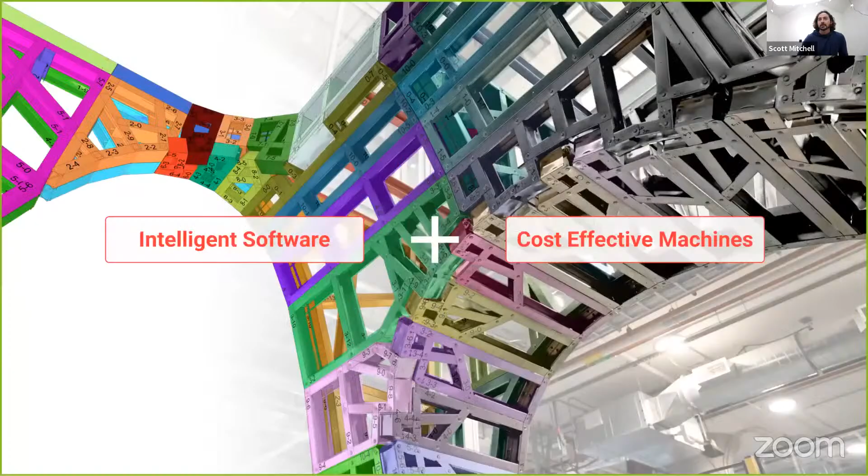Our mission is to enable architects to realize their boldest ideas. And what we've come to realize is that means enabling builders to construct those bold ideas efficiently. And the way we are able to do these things efficiently is by combining intelligent software with cost-effective machines. So we're using some unusual machines, and we'll get into what that means and some examples of that. But it's different than some of the machines that you're probably more familiar with.

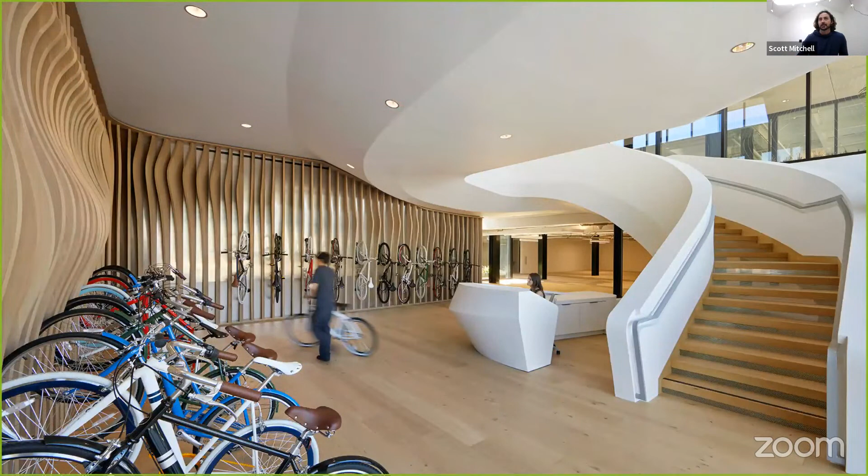So our software generates a fabrication-ready model like this through a computational process, and then automatically generates the machine files and the assembly information that you need to go build that exactly as the model has. We're going to get into a whole bunch of examples, but the idea here is you can see there's a wide variety of different geometries that we're able to take, run through our software and a computational process, and build extremely precisely.

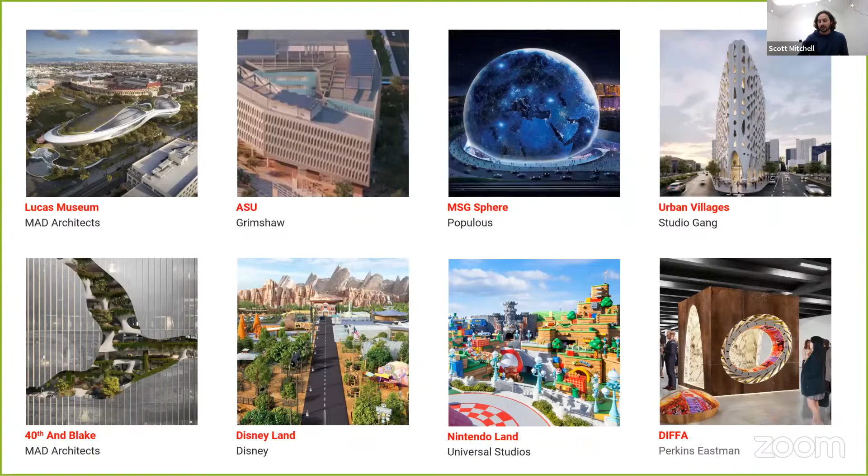And like Jose Luis said, we develop software. Stud Finder is kind of our main software. And also the reason we're called Stud.io is because a lot of what we've done is with steel stud framing. But we'll get into a couple other types of fabrication as well. And we've been able to take this software and work with builders and architects to build some pretty exciting projects, from the Lucas Museum, MSG Sphere, Nintendo Land, Disneyland, Universal Studios. A lot of really cool opportunities to demonstrate the value of some of the research that we've been doing.

But at a glance, what a project looks like for us and what we get brought in for is sort of probably what you guys are studying for computational design. You have a bunch of unique but similar conditions, and you want to develop a computational approach that's going to allow that to get designed and allow that to get fabricated and built. So this is an example project.

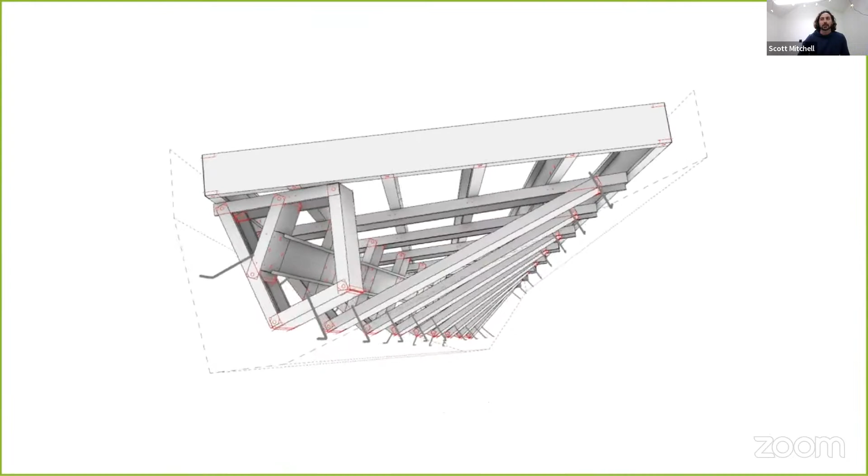This is an actual project that we worked on where there are all these GFRC, which is glass fiber reinforced concrete columns. They're all slightly different shapes. We want to develop a system that will generate automatically, go to the machines automatically, and be easy to put together. You can see the bulk of this is light gauge steel stud framing that's digitally fabricated. The software is adjusting to changes in the geometry from panel to panel, and basically changes the layout of the studs to accommodate the geometry of that panel.

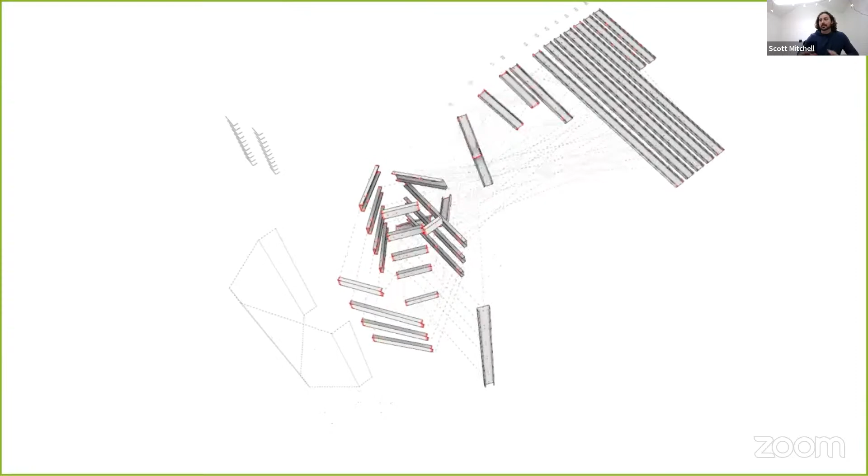There are also those little rods that just flew off, which are bent bars, another type of fabrication we'll get into. But the idea with all this is that the model is fabrication ready. So you give it the geometry, it gives you back all of the fabrication information you need. Every single screw hole, the length of every single member, all the connections that need to be made, and all that information is contained in the model, can be sent to a machine that's going to make the pieces and then communicated to a person that's going to be putting those pieces together. Almost like a Lego set or an erector set. So this is the kind of thing that we're doing every day on different projects that are getting built.

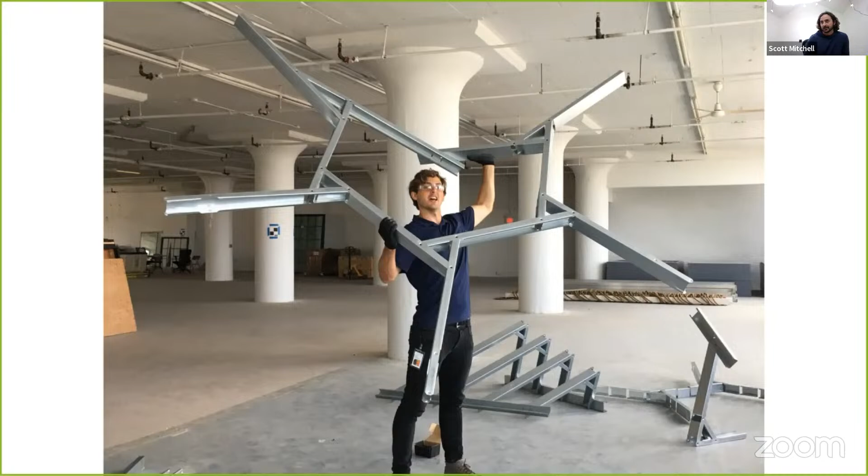But I want to back up for a second to the beginning of this story. This is me a little over 6 years ago. This is in Boston at Autodesk over in the Seaport. I was an intern at Autodesk. This was while I was in architecture school, pretty heavily focused on computational design. And they basically gave me this opportunity to come into Autodesk, where they have all these machines in their technology center. And essentially they said, just do something cool with this steel stud roll forming machine. And so I got to spend the summer just focused on that. And basically I haven't stopped since.

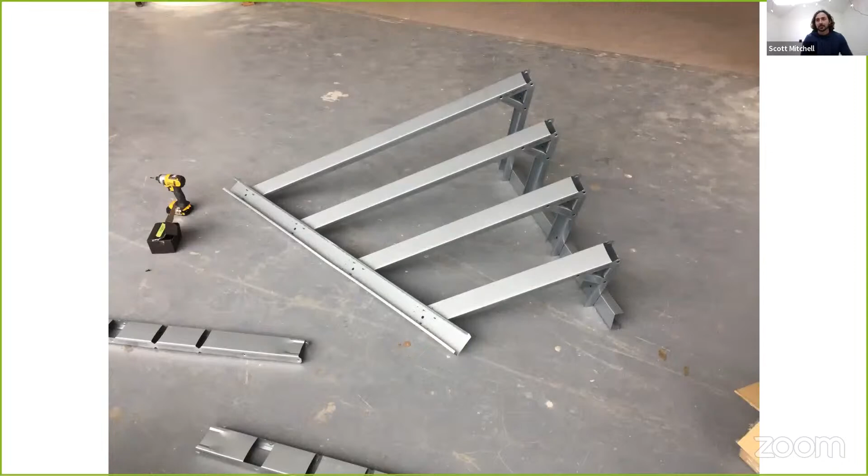But week one, we were doing real simple stuff. The idea in my head was, I want to find ways to use this machine that no one's ever thought of before. And probably no one had thought of this before, but it's not necessarily a good idea, but it was a start. So we were playing around in Dynamo and Grasshopper, and we're exporting stuff to this machine. Here we're working with laser cut wood pieces, which doesn't make a whole lot of sense in hindsight, but led to some other ideas. And by the end of the summer, I had actually come up with a pretty impressive structure using this machine. It's building a giant sphere with steel studs. It's just something that people hadn't done before, and that was really what was exciting about it for me.

And I could have stopped there, but I wanted to build some generalized system that would allow us to explore a whole bunch of other algorithms and things that were of interest to me. And so I started working on this idea that you could take any planar polygon, feed it into the software, and it would generate members and studs on top of it. And I was using Grasshopper. You guys are probably familiar with the exact same workflows that I was using. And I would take every polygon and solve it independently.

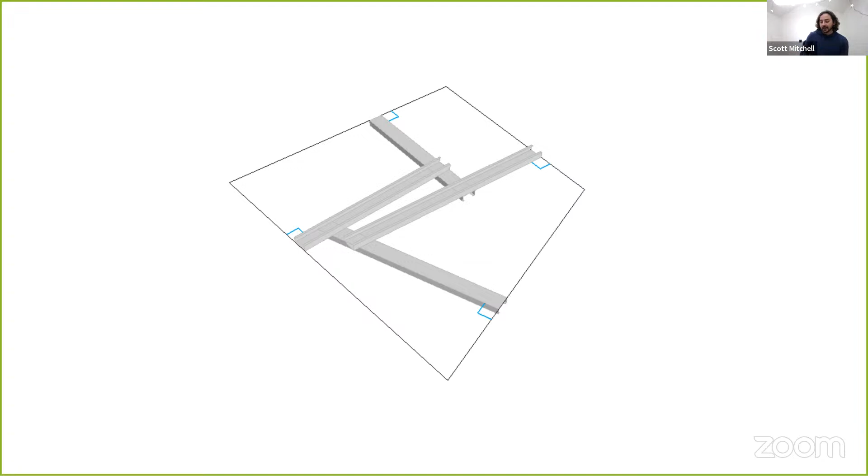I can't believe you found this. I can't believe you found this photo. Dude, there's a bunch of them that are pretty good. Oh boy.

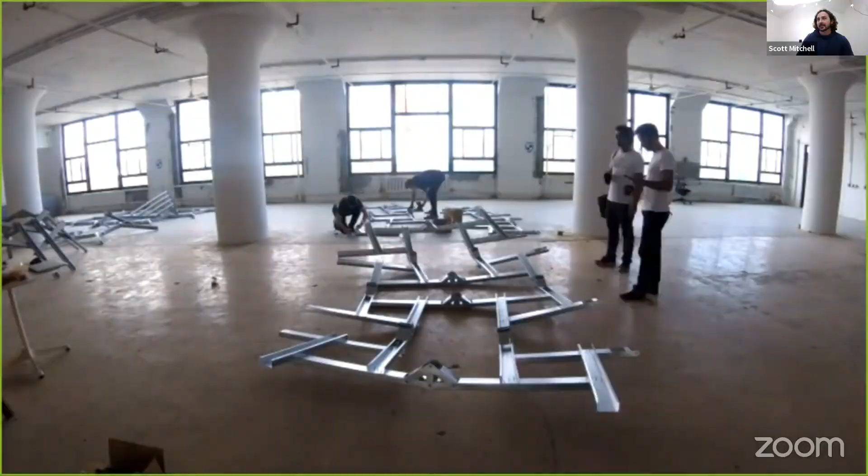We've come to do things in 3D, but that's still at the core of the solver that our software is built on. So basically I spent the end of that summer, into going back to my last year of architecture school, building out this software, testing it on some different structures, and it built this generalized tool that would take in lines, and it would tell you the valid ways where you could connect studs along those lines. So for any given line network you give it, there may be none, or there may be a handful of different ways you can orient studs along those lines and connect them in a valid way. So that is the solver that's still at the core of what Stud.io is doing today.

And there's a particular type of machine that is sort of a good candidate for this approach, for this type of computational design. So you're probably familiar, these are the types of machines that architecture students and architecture studios are using all the time. They're great for mass customization. We got robots, 3D printers, CNC routers, laser cutters. You can sort of make whatever you want with these machines.

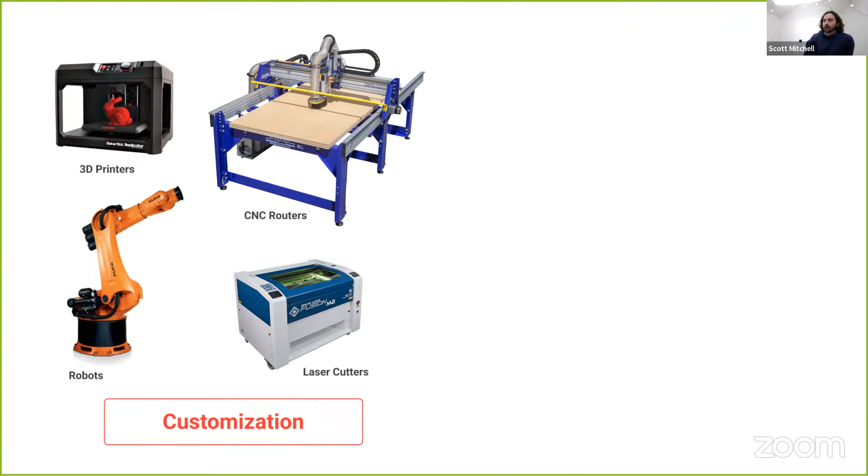So what we've realized we're doing is we're trying to bring the customization that computational design and architecture school kind of teaches you, bring that to these unique machines. And it turns out there's a whole bunch of potential when you do that. And it also turns out it's relatively unexplored. I still think there's a huge amount of latent potential for these machines to do extremely cool stuff.

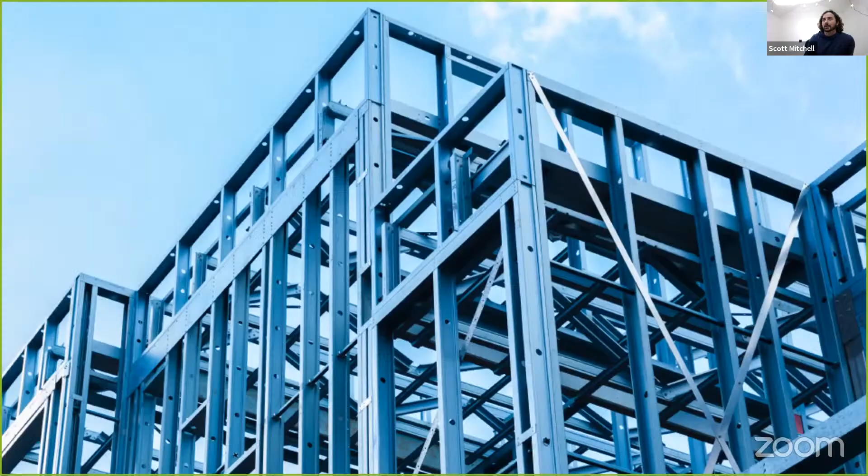But I want to focus in on the roll form machine for a second. So this guy is meant to just roll up studs. If you've ever driven by a construction site, you see something like this. The steel stud roll form machine makes basically exactly this kind of thing. You'll notice it's typically flat. It's typically walls and components meeting at 90-degree angles, not a lot of geometric variation. And that's because again, it's focused on doing one particular thing.

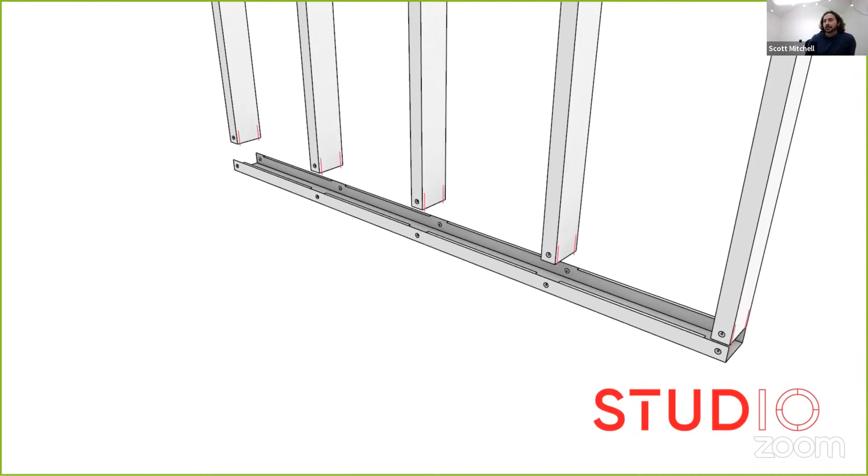This is a very basic one for light gauge roll form systems. So this is like a stud and a track, how you might build a wall. You could also pass one stud through another. Most people just do this at 90 degrees, and that gives you most of the typical buildings being built today. But we can change the angle of this. We just have to change where the punches are happening that allow one stud to pass through the other. And if you triangulate this connection with additional connections across the structure, you can fix two members at a particular angle.

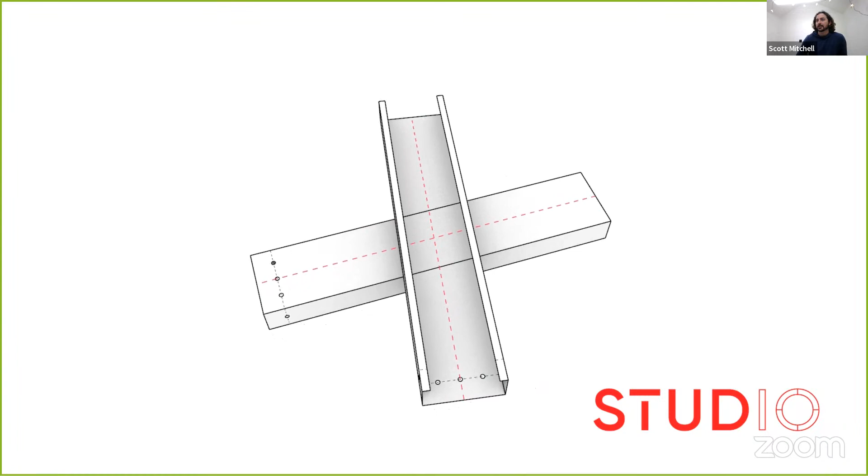And similarly, this is another connection type that we call handshake connection or back-to-back connection. We can take two studs back to back and do this 3 web hole punch, then align some holes on those punches so that if you put a screw through them, it will fix the 2 studs at a very particular angle relative to one another. Angle can be whatever you want. So it's still pretty simple, just 2 connection types.

And most of the stuff I'm showing you today uses just those connection types. But with just those 2 connection types and the parametric nature of them, you can start to do some really interesting stuff. Whereas most people are just building flat rectangular frames, we can start to break out of the plane and do 3-dimensional geometry. Like one of our first tests was just running every platonic solid through this.

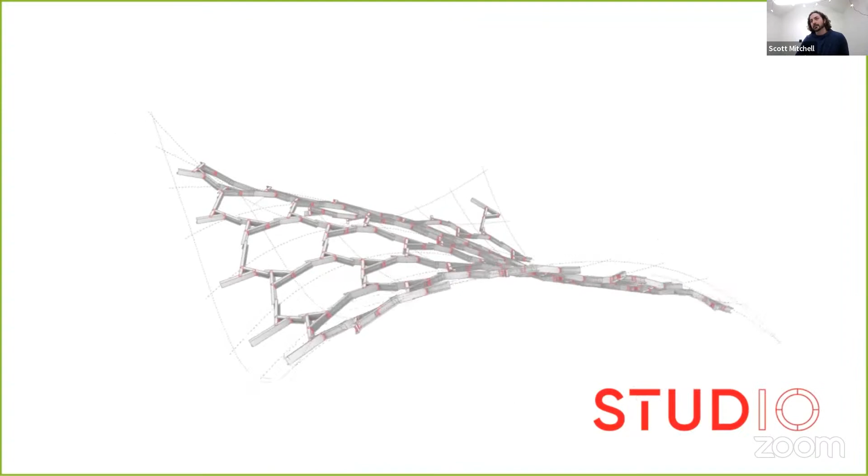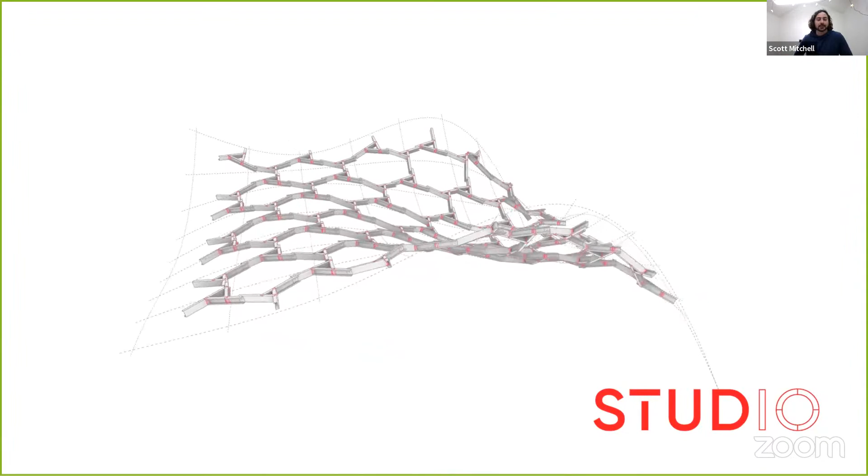But you don't have to stop there. We can really feed any surface into what we call the triangle system. And it doesn't matter how complex that is, it can be doubly curved. You can just generate this pattern across it where every single member is unique, but it has all the holes that it needs to connect to its neighbors at the particular orientation that's going to allow the builder to recreate the exact geometry that's in the computer.

So that's one example of a system. That was one of our earliest systems. But basically, you can write your own scripts, Grasshopper or Dynamo or whatever language you're trying to use to utilize these tools. You basically just have to draw lines and produce an analytical model that the solver will generate fabricatable members on top of. So you can come up with all different kinds of systems just using this idea of building on highly constrained fundamental components, these operations, into slightly more complex combinations or connections, and ultimately into entire systems.

And as someone who has kind of a history with other types of making, this idea I've noticed connects to other ways of creation that I've been involved with in my life, like playing games. I think the same way you have these components on the left, your pieces in chess, they are constrained in how they can be used, especially on an individual basis. There are very particular rules about how they can move. But what's interesting is when you start to combine those moves into strategies.

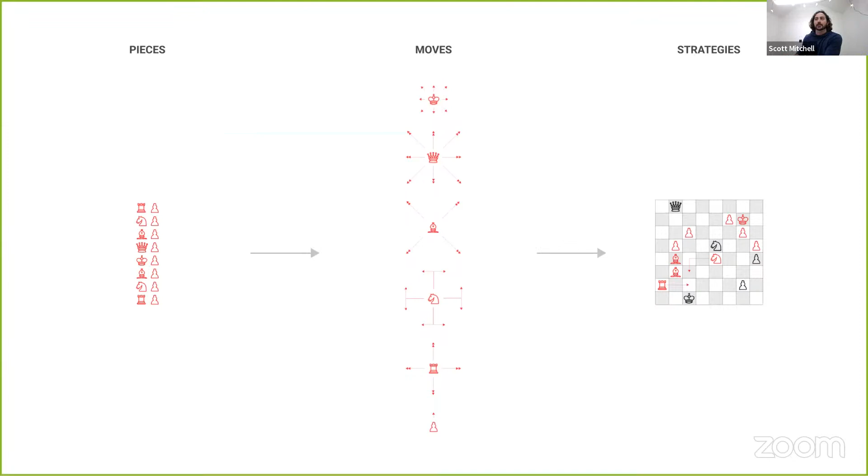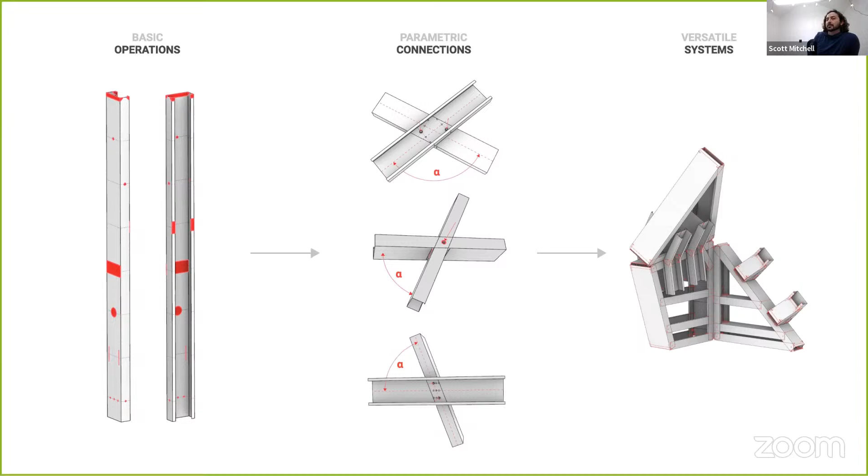So this, I think, is something unique to these types of machines that are industry focused versus the 3D printer, which has no constraints. You have to think creatively about the atomic building blocks of the machine. And I think what's really interesting about that is you have to be creative. It's like problem solving. There's this huge area of potential use of the machine that's just unexplored because people don't think to combine some of these operations in ways that they can be designed or combined.

And one of my favorite examples of that is the ability to curve studs coming out of the machine. So the machine wants to make straight studs. It's marketed on its ability to make straight studs. But it turns out with a certain combination of punches, you can actually start to curve studs in a precise manner coming out of the machine.

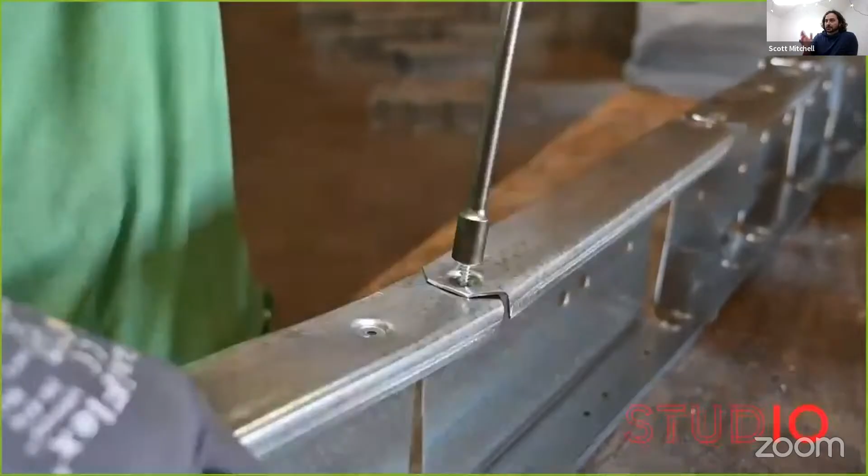And basically what you do is you punch what's called an end truss, which is that slit across the web, the wide part of the stud, and 2 little punches on either side of it. And if you snip between the 2 punches, fold them over one another, put a screw through it, it's going to fix the segments of this thing at a particular angle.

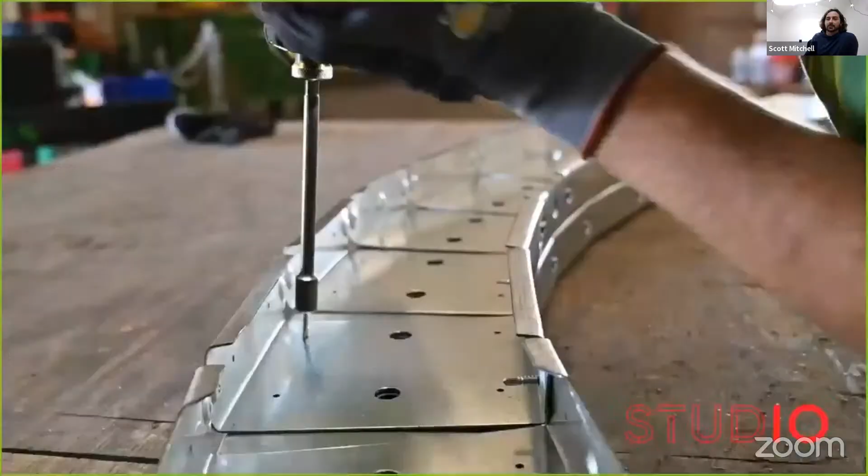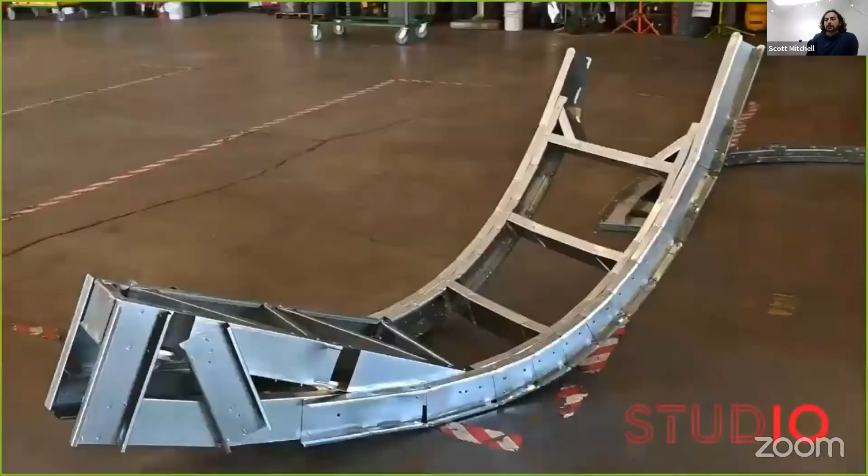One of the downsides of that is that you're cutting out some of the strength of the stud, but if you combine that with another stud that's back to back with it, that has alternating cutouts, you regain that strength, and you can start to take any sort of curve or polycurve and generate studs along that as well. And as you aggregate those curved studs, you can start to generate entire curved and doubly curved geometries this way.

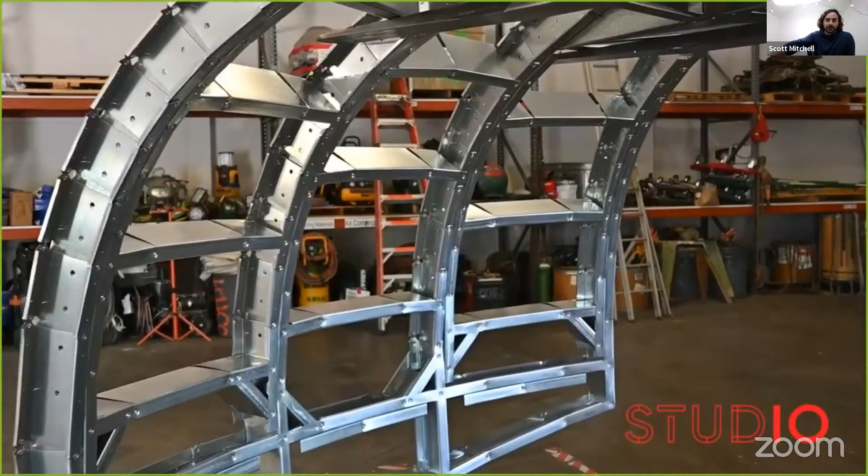And the reason that's so cool is the manufacturer of the machine didn't even have that in mind when they designed the machine. It's just something that happens to be possible given the right creative approach to using the built-in capabilities of the machine. So we're misusing the machine, but producing an extremely valuable use for the machine.

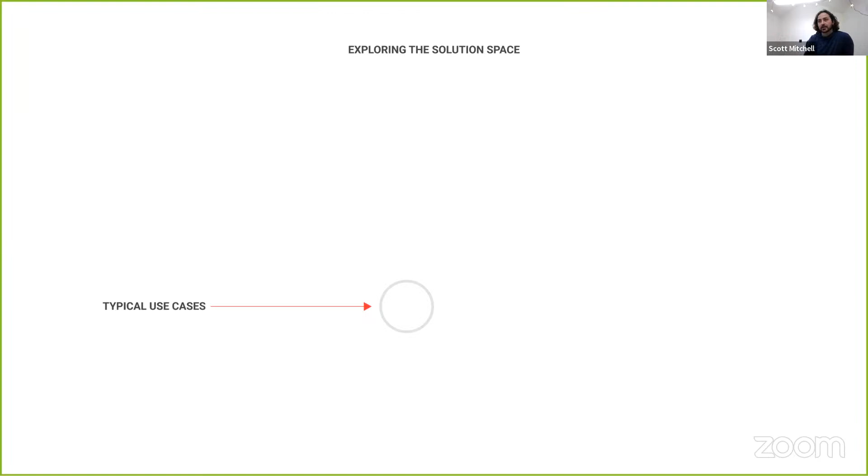And I think that's why we've had some success at Stud.io. There's a perceived solution space for these industrial machines, which is the typical use cases. So the contractor goes and buys a machine with that in mind. But we think that that's just a small portion of the vast potential of use and ways to leverage what the machines are capable of.

And so I think if you go back to those images of me messing around at Autodesk with Jose Luis 6 years ago, that was taking our first steps into what's possible if you start to be really imaginative in how you use the machine.

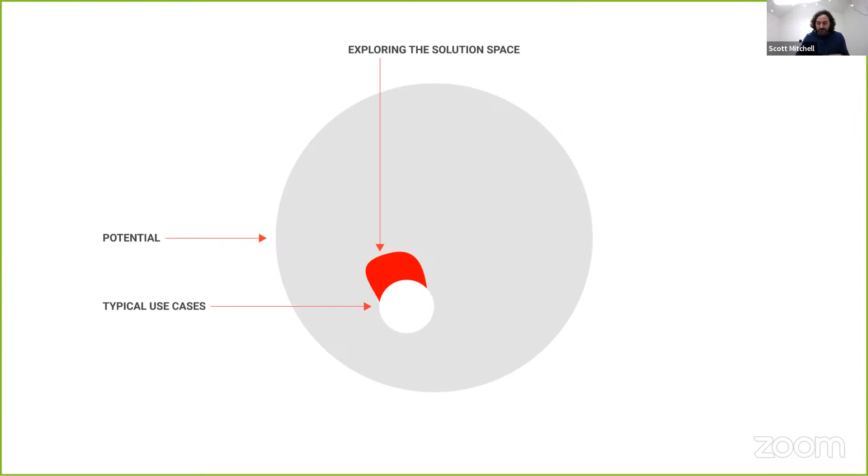And the way it's turned out is like every time you do one little experiment or play around with something, you generate ideas for another experiment that then maybe you go use what you learned there on an actual project, and that project spurs a couple ideas that can be developed further as experiments later on. And I still feel like there's so much, even with just the steel stud roll forming machine, there's so much potential that is still to be explored.

And to me, it's what gets me excited about doing the kind of work that we do. Because it's playful. Like we're playing a game. We are playing the machine like an instrument.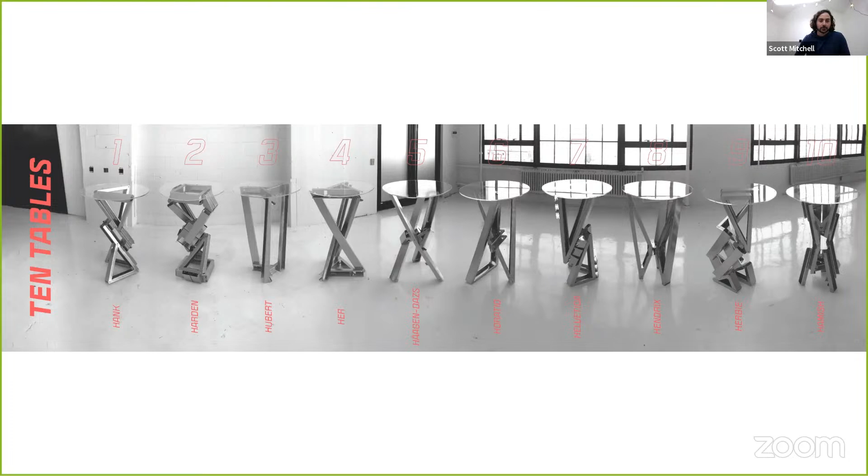So in between projects, which we'll get to in a second, we do fun stuff like try to make furniture out of the machine. We at one point just built a giant bird with the machine, just trying to prove what sort of detail we could get with basically 2x4 steel studs. We also have a design for a foosball table with the machine. It's like anything you can imagine you can build with this thing that's meant to just build boxes.

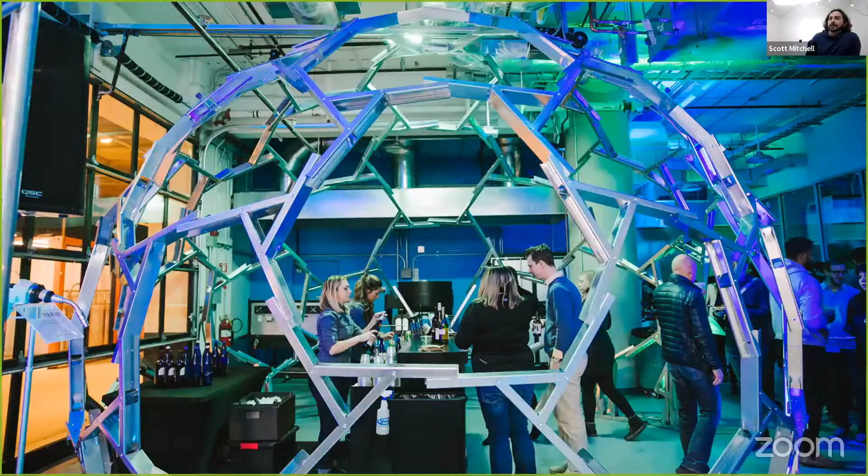So I've just got a whole series of images now that show some of what we've done since that time. So we started playing around with just kind of nonsense details with this machine, but that has led to all kinds of different projects and different geometries and different algorithms that we can deploy on projects.

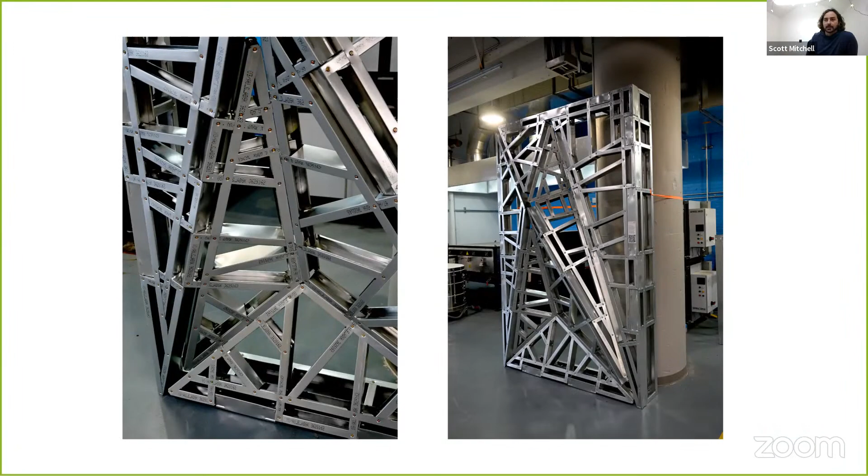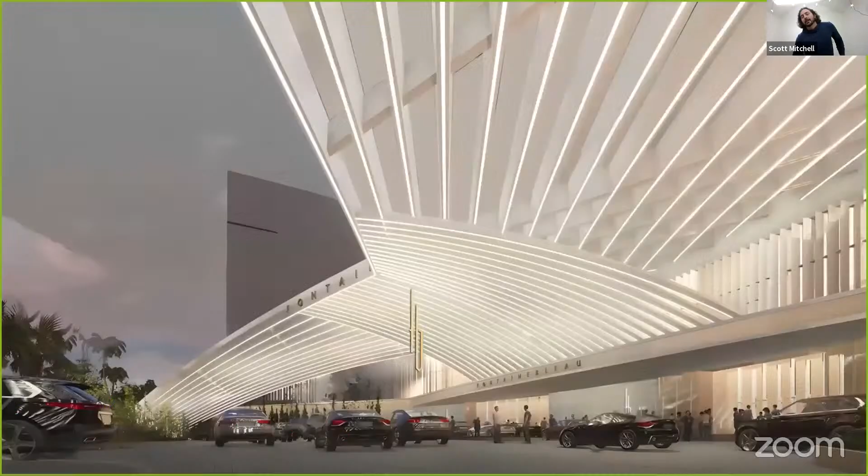It has also led to the development of our software, which allows people to design the more typical use cases for these machines, but also start to get more creative in what they're designing and what they're trying to build. There's really kind of unleashed creative potential. So anyways, it's been a very exciting journey. And so that's a bit of the history and the theory behind what we've been doing.

So I want to talk a bit about a couple of case studies where we've actually used those tools and the knowledge that we've developed on actual projects. So I'm going to start with the Fontainebleau Casino. So this is on the Las Vegas Strip. It opens up in about a month, but I think our scope is pretty much done at this point. We were brought on to help with the porte cochere. So this is this huge entrance to the casino that you drive under,

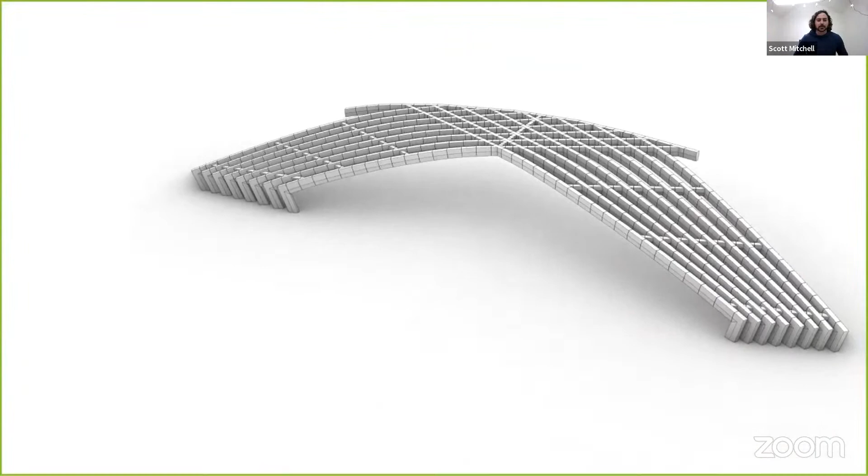and it's big. But the whole thing we're running through our stud finder software, along with a whole bunch of other Grasshopper scripts to rationalize the geometry. But before we get into the workflow, a little bit about the project. Like I said, it's really big. 500 feet across, 100,000 square feet of finish. There are 436 unique modules that made up the legs that are going out to the ground.

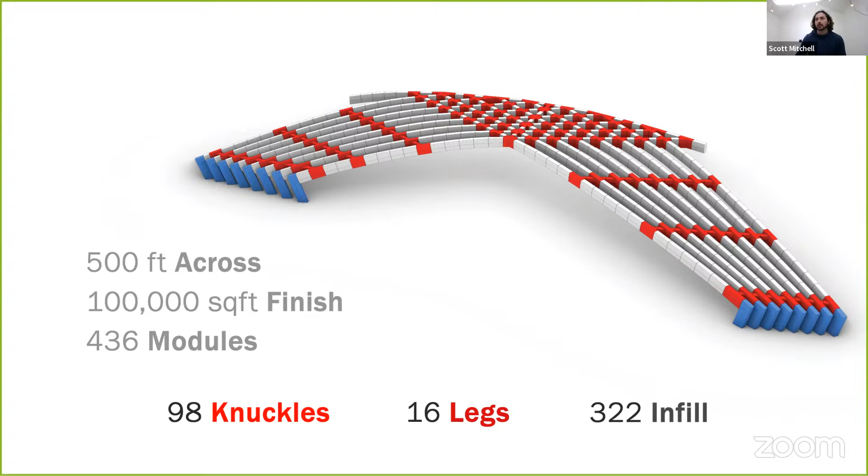Those modules break up into some types, we should say. There are 98 knuckles, and that's where the different beams or legs intersect each other. So the most complex one, we have what we call the legs, which is the actual part that hits the ground, and then the rest are the simple panels, the infill modules. Although even those are all unique shapes. All 436 are a unique shape. So we want to come up with a system that can execute all of those modules.

And so as a builder, you might say, I just want that to be a box. But as an owner of the casino or as the architect, you want it to have a little bit more geometry, make it a little bit more dynamic. The old way of building that, if you just took each side, built a flat frame, tried to put them together, you're not gonna be able to do that quickly and precisely.

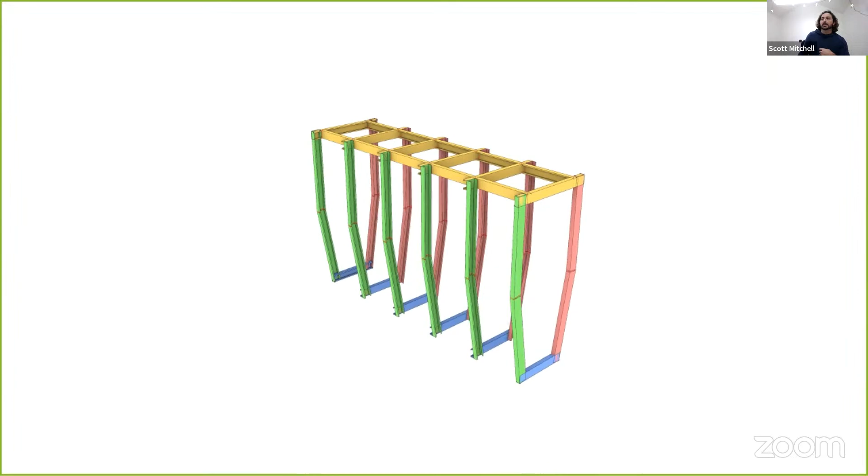So we use that curved stud detail. There's the handshake detail. So with both of those, we can have a ring of very accurately and efficiently fabricated and assembled studs around the geometry. And then we can connect those with the dimple or the typical connection. And that gives us a system that doesn't just reproduce the two-dimensional faces of the object, but the entire 3D object accurately, no matter what the geometry is.

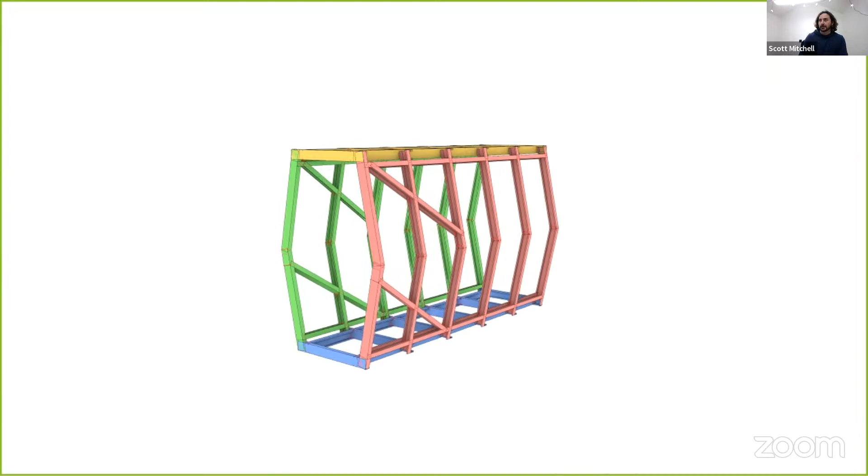And we don't just stop at generating the model. Obviously, we go to the machines, we produce the machine files to make the parts, and we produce the drawings that people need to put these parts together. And I mean, we're basically doing everything we can to make it feel like putting a Lego set together.

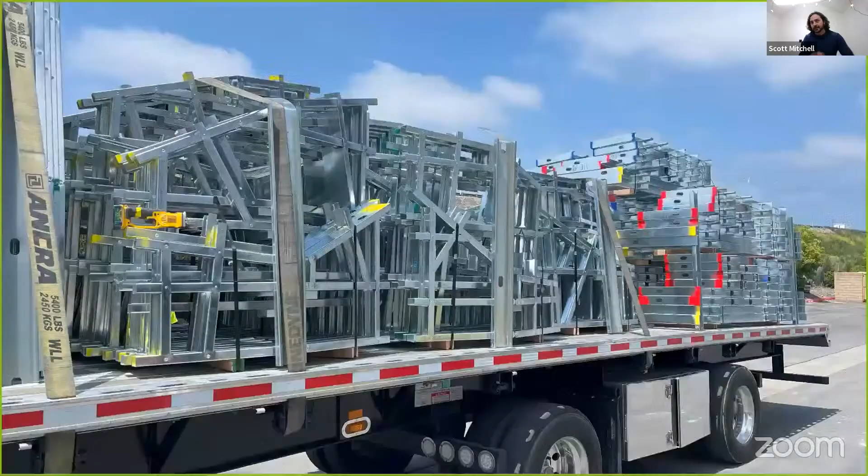Even the color coding on the drawings versus what's actually showing up on site. So they can basically just take the yellow panel and attach it to the red panel. The holes to put the screws in are already there, so they don't have to measure anything or use a protractor. That allows this stuff to go together extremely efficiently. Here's some of those panels installed.

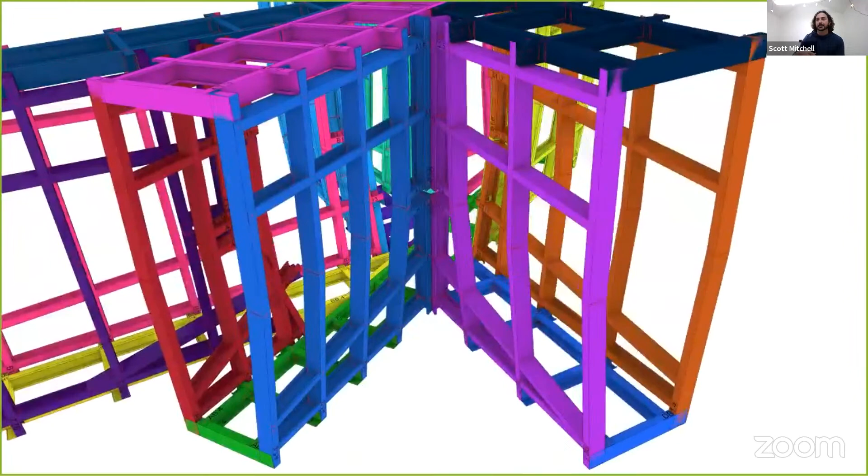But those are the simple panels. The infill panels take a little bit more complexity to accomplish, but basically the same idea. You just have to deal with where the different extrusions here intersect each other. So we develop a script that's going to handle that and feed the right information into Stud Finder, so that given a module, it will break down into several pieces, which break down into panels.

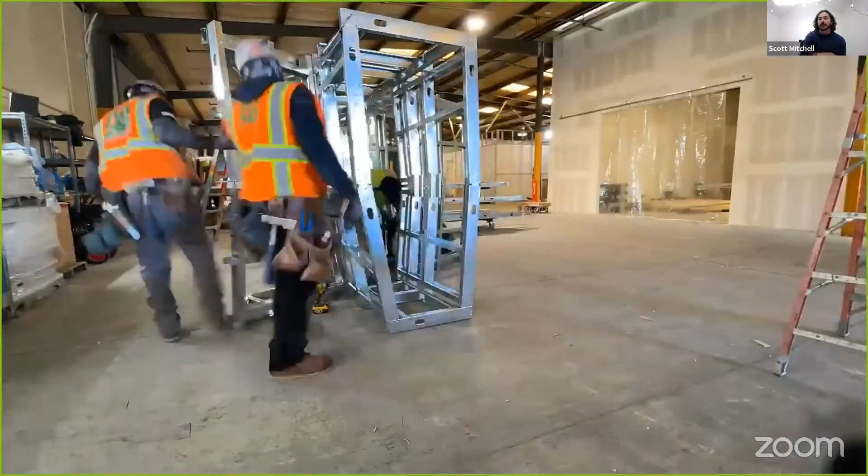And as that geometry changes, either across the project or as the architect changes the model, all of the assemblies and sub-assemblies and parts update to match the change. And then that goes together pretty dang efficiently, especially for a complex job like this. It's hard to measure that efficiency and speed sometimes, because it's not like they're building an identical building next door that we can compare against as a control.

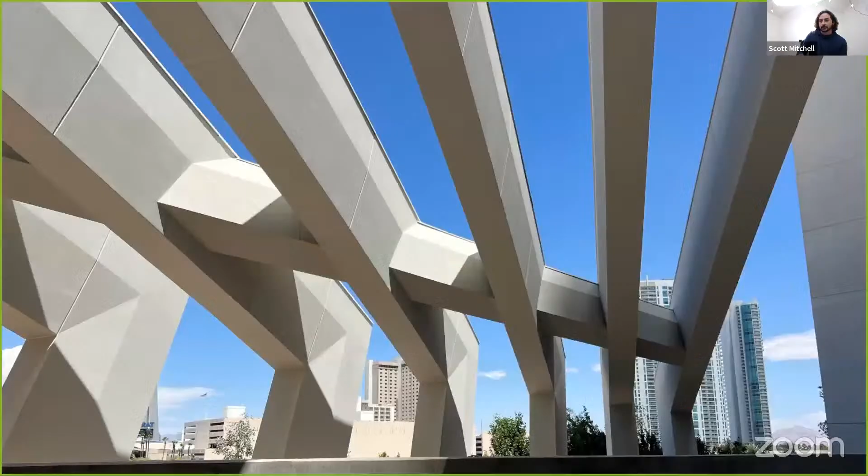But we can compare against the client expectations. And for this project, the assembly took a third of what was budgeted. So obviously a lot of value being added for the contractors there. And also that's the kind of cost savings that enables features like this to get built instead of getting value engineered out of projects. There it is, completed. And that one's opening up next month, I think, in December.

So moving about half a mile down the strip, another one of our projects was the MSG Sphere. We did not do the sphere itself, but we did the collar that's underneath the sphere. It had its own geometric challenges that we worked to figure out. When we enter a project like this, we think about what the constraints on the geometry are. Obviously, this thing is going to be curved in plan. It's going around the base of the sphere.

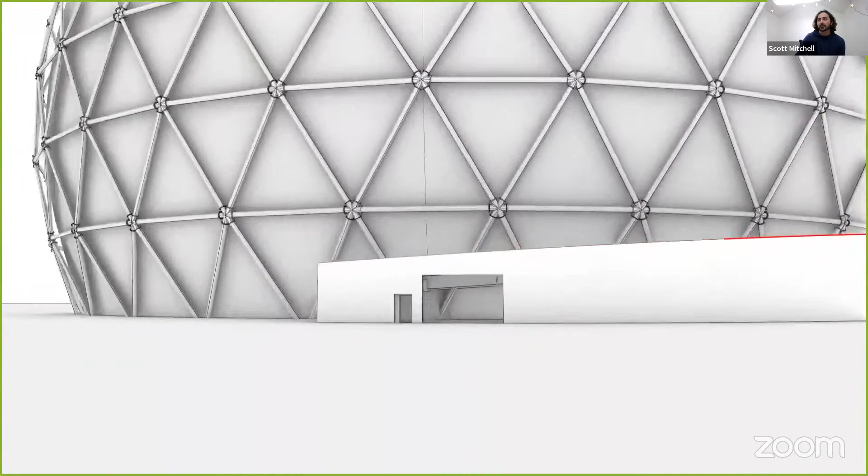It's sloping in elevation. And the most complex part of this was that it's slanted out, and that slope is changing. So how do we deal with that variable slope as it's moving around the building?

And the reason you really have to think through this is, I don't know if you've seen the sphere since it opened, but it's got all these LEDs on the outside. It's a super expensive building, and they needed to cut costs on the collar. So they wanted to build it out of a flat system, not some expensive curved system. So the challenge becomes, how can we take a flat system, with a flat frame and the foam on top of it, and create this geometry?

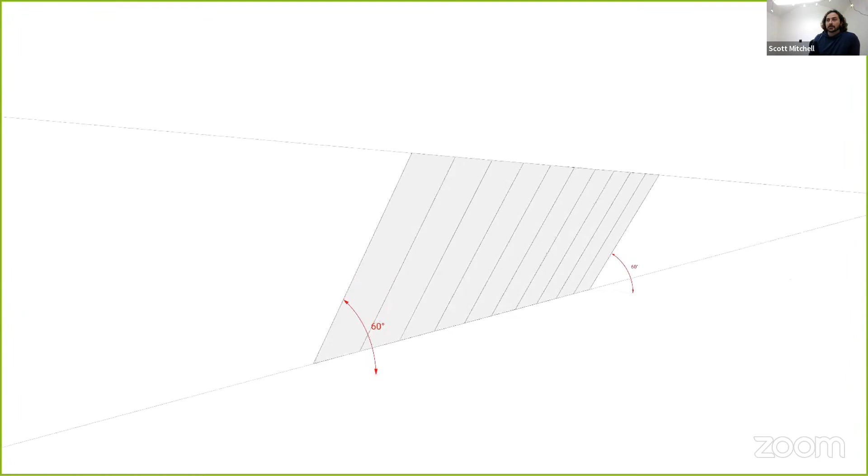So we spend a lot of time as computational designers thinking about geometry, and we start with the basics. If this is a flat wall, it's obviously very easy to panelize and break up into flat panels. If it's sloped out, it's still easy. If it's curved in plan, you see problem number one, which is that it fans out in elevation. But that one's easy to fix, because instead of using rectangles, if you make these into trapezoids, you're good. So problem number one solved.

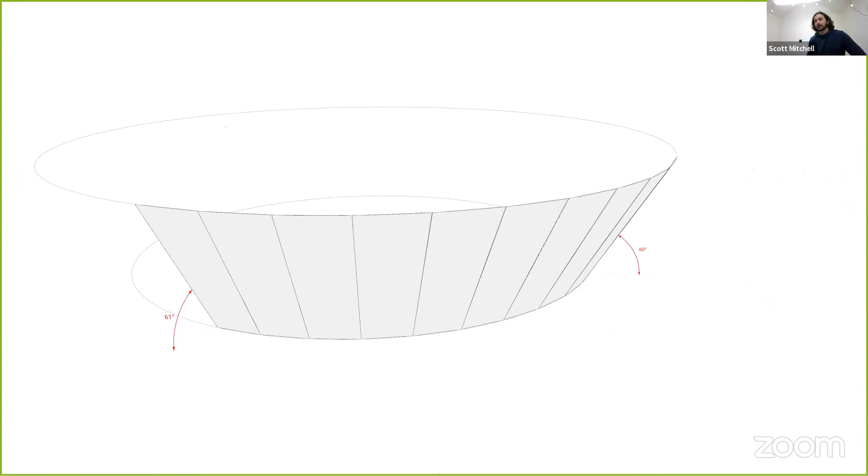Problem number two, though, is, remember we mentioned that the slant is variable. So if we start with less slant on the left and go to more slant on the right, we start to fan out in section as well, which was not design intent. The owner doesn't like that. So we have to come up with a solution. Intuitively, you think, I want to just take one corner of each panel and push it to meet its neighbor, so this thing is smooth.

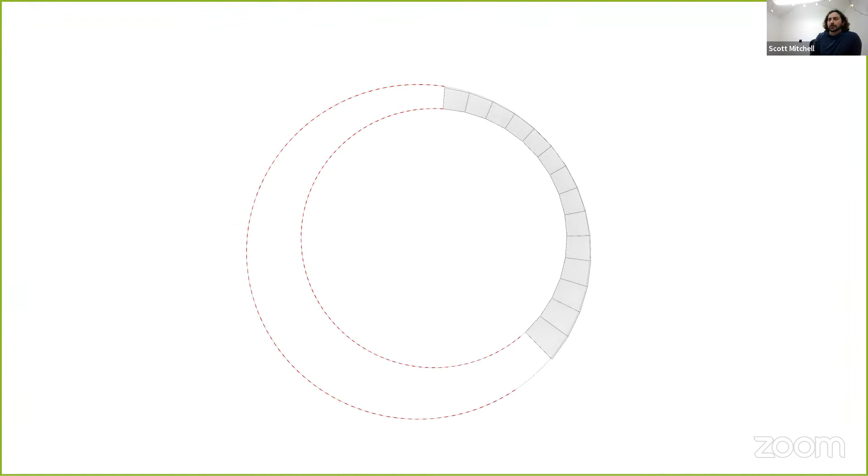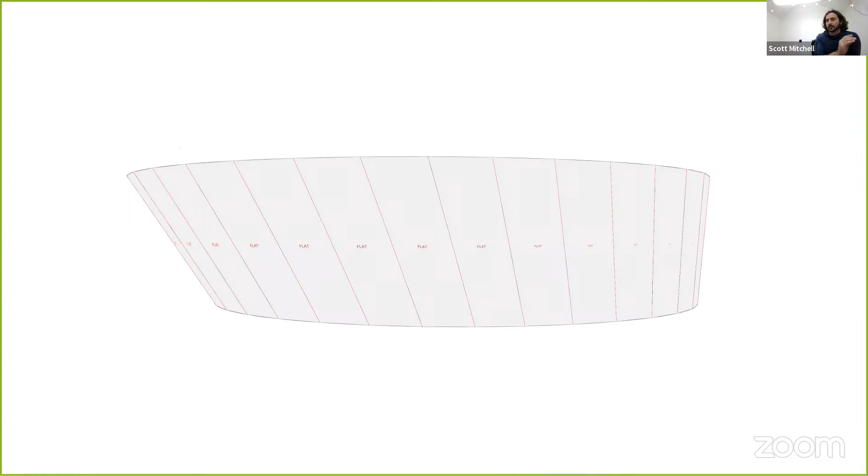But of course, at that point, your panels aren't flat anymore. But at least that gives you an understanding of the twist that is almost necessary for each panel to make it smooth. But we kept going into the geometry, and we realized that the top and bottom radius of this thing define two arcs, or two circles, which define an oblique cone. And what's nice about a cone is it's basically a pyramid with a whole bunch of sides that are flat. So instead of using the architect's joints, if we use joints that run through the apex of the oblique cone, we can get flat panels.

So this was kind of the geometry exploration side of this project, and we came up with two ways to break this thing up. Either you follow the cone and you can get flat panels, but your joints aren't necessarily what the architect designed, or you use the architectural joints and panels, and you're going to have twisted frames.

So we looked at, okay, what would it be like to deploy each of these systems? So on the left, you've got the slanted joints, but flat frames. And on the right, you've got vertical joints, but we have to make up that twist in the finish.

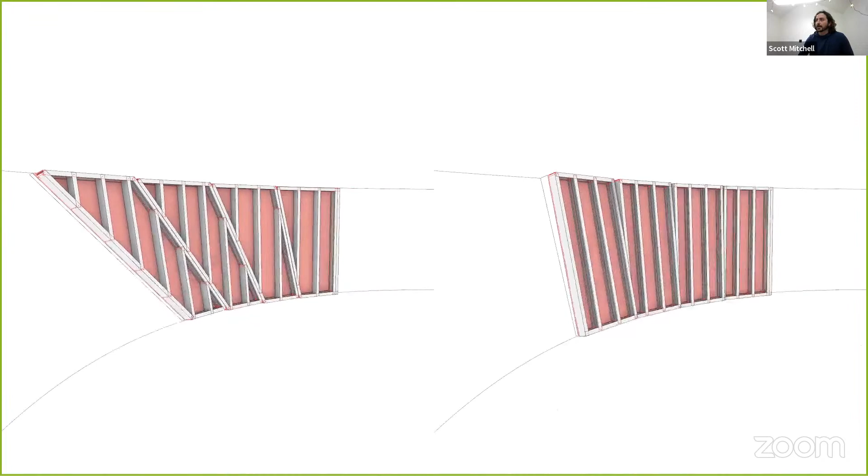And the way that we proposed to do that was, we'll keep everything flat, just change how the frames in the back are oriented. And then the foam that's on the front of this thing, we'll just put all the twist into that foam. So you can cut that with a hot wire, which is the same way they would cut it if it was flat as well. You just have to change how they're moving the hot wire as they cut the foam to get the right shape. And so we gave them both options.

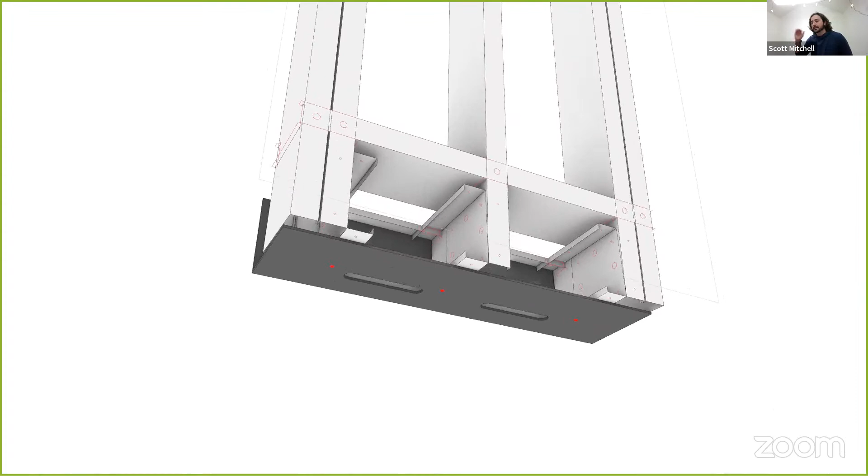They decided to go with the architectural joints, so the vertical joints. That's fine. So we went with the CNC hot wire foam. But this is what the framing system looked like underneath that. So you got just a flat frame that handshakes to a horizontal frame that gives you the correct tilt out. That registered to some other components, and then finally you put your foam on the outside, which gives you the exact geometry you need to line up to the panel right next to it.

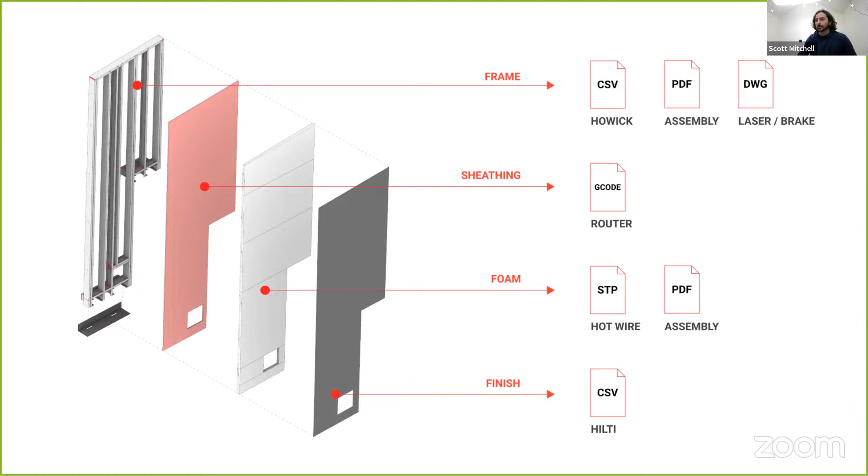And one thing that's becoming more and more important to us is not just talking to steel stud roll forming machines, but talking to all the machines that are going to work together to build what we've been calling a system of systems. And there are constraints within each system, and there are constraints between systems. But ultimately, you just need to solve those constraints and send the information out to the machines that are building them. And this works. So we send information out to the roll forming machine, send information out to the drawings that are getting printed, and the humans read and put the parts together.

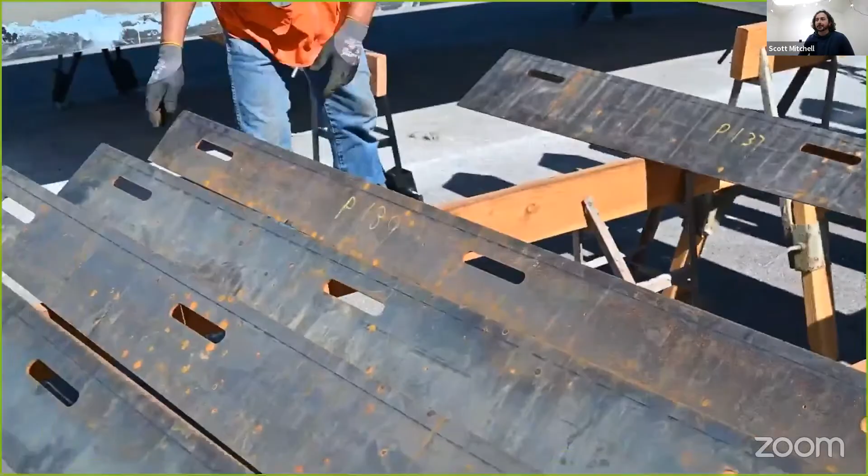Let me try and speed up through this. We've got the handshake connection there with the alignment holes that fix that bottom frame at the correct angle. We had these brake shapes, which are heavier metal that were cut with a laser that also have holes in them that align to holes in the frame. There's a bit of a weld detail that has to happen there. We had CNC cut sheathing that sat on top of this, and then CNC foam that sat on top of the sheathing.

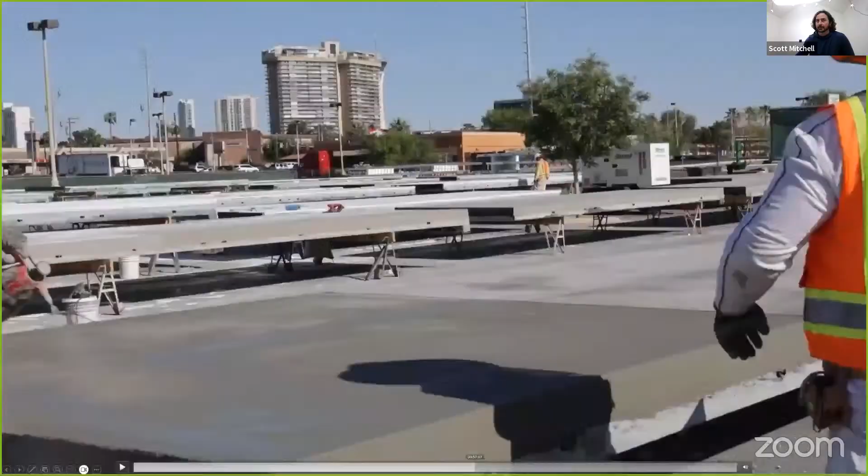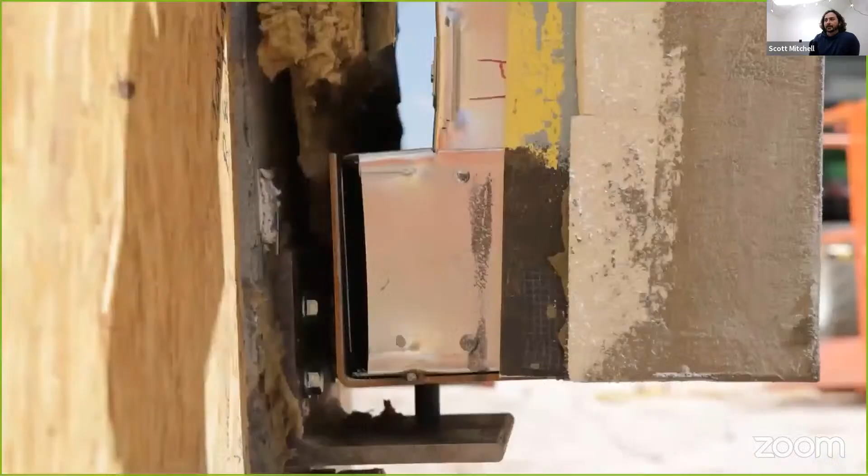And then on site, we had a robotic layout that basically turns to the exact right location, shoots a laser on the wall, and that's where they would put this embedded angle with a pin in it. And all this is coordinated with the digital model. And then all they need to do is fly this panel in, which has holes that are going to line up to that pin. You just set it right on there. So that's a pretty cool project to work on.

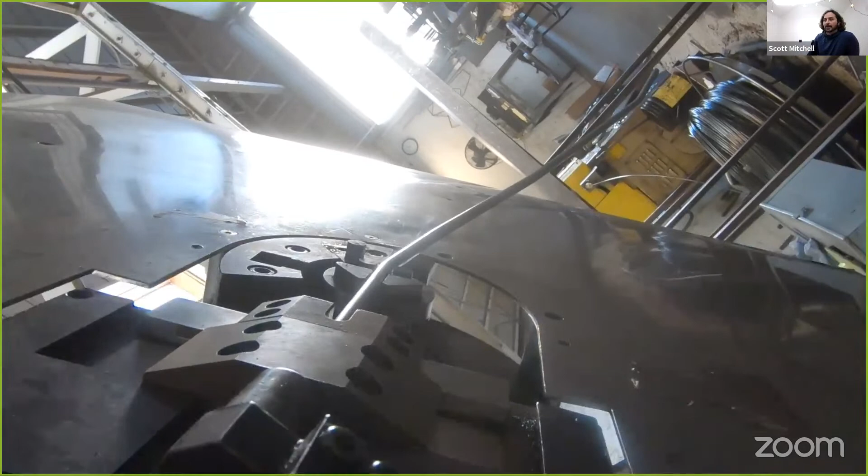I want to move on to another type of machine now. So we've been talking all about roll form machines, but the same idea works for other types of machines. So this is a wire bending machine. If you're not familiar with them, they basically just take a huge spool of wire and bend it to a shape. And when we've been walking through the shops where they have these things, this is typically what they're making. They're making like rebar stuff.

They're making shopping carts. They're making the covers for fans, hangers you put on your door, all that kind of stuff. So these are mass production machines. They don't make one of each of these. They make thousands. But we wanted to take this and just make only custom parts for this MAD Architects project in Denver. This is called One River North. Basically just a normal condo building, except it's got this huge canyon carved out of the facade.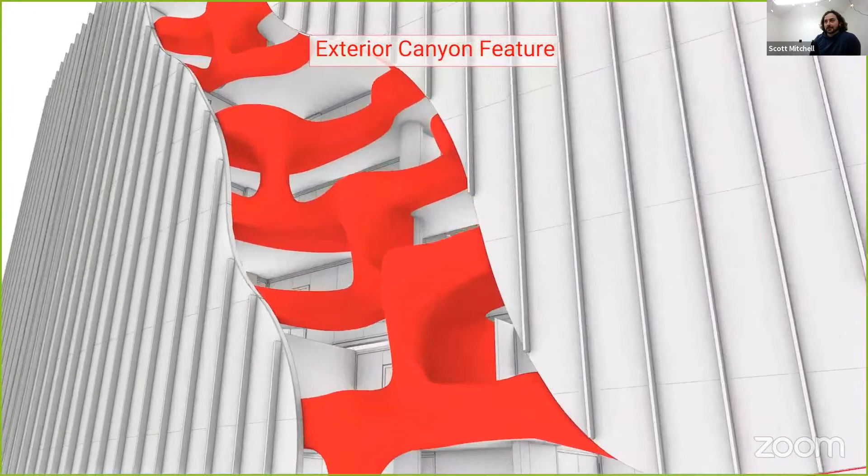And so we decided we were going to use the wire bending machine for this. It's a plaster finish. So underneath the plaster would be this bent wire system. All of these digitally fabricated with our software and sent to that machine we were just looking at, and then prefabricated as a set of panels.

So basically the steps to make something like this work are, one, you've got to familiarize yourself with the machine. And we've talked about kind of understanding the basic operations the machine's capable of. And then we develop software that allows you to just very easily input some geometry and then run it through, generate the operations for the machine, generate the files to run on the machine.

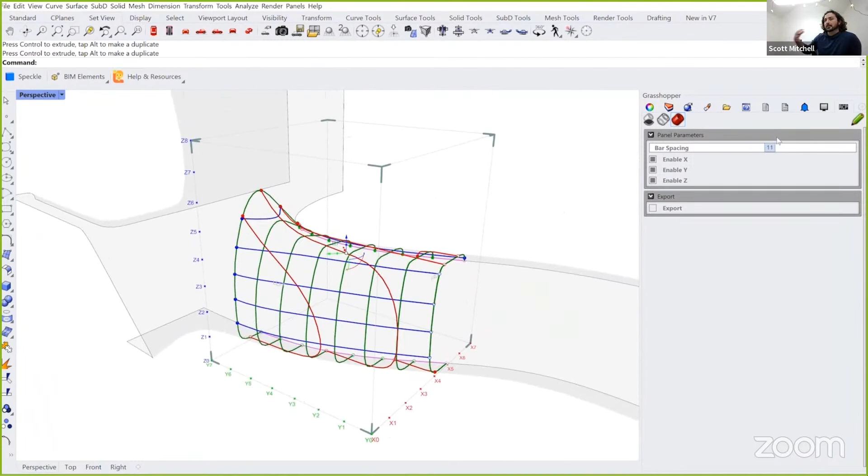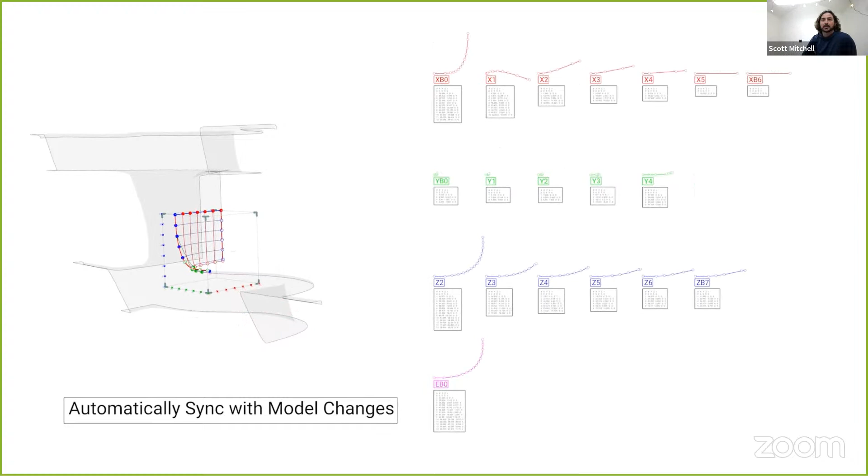And whether as your geometry changes, so those are the files. These are called XYZ files for this machine. You can see each shape has a series of bends at particular angles. But all you've got to do is just set up your design surface and set up the bounding box of the panel you want to make, and all the rest of the information is generated automatically.

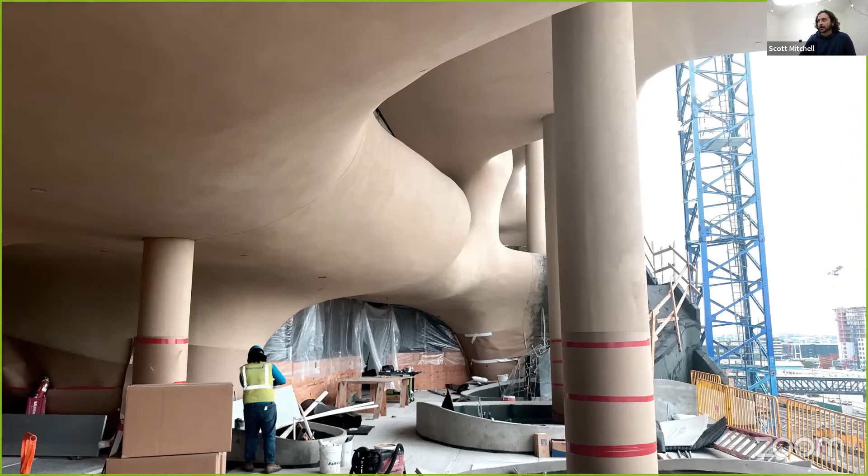So there are the machine files and then also the drawings the guys use to weld these pieces together. So everything automated, everything within the software. Just in Grasshopper, we set up the surface and the boxes. And again, the idea is to enable architects' design intent to actually happen without compromise. That one's also nearing completion in Denver. Pretty cool project. I think this is the last project I'll show.

This is the Lucas Museum in Los Angeles. We've actually done a few scopes on this project, but I'm going to talk about the first one we did, which is the ribbon, the podium ribbon, which goes around the bottom of the building. So for this project, we involved another machine, and this is one that we're using more and more. It's a tube laser.

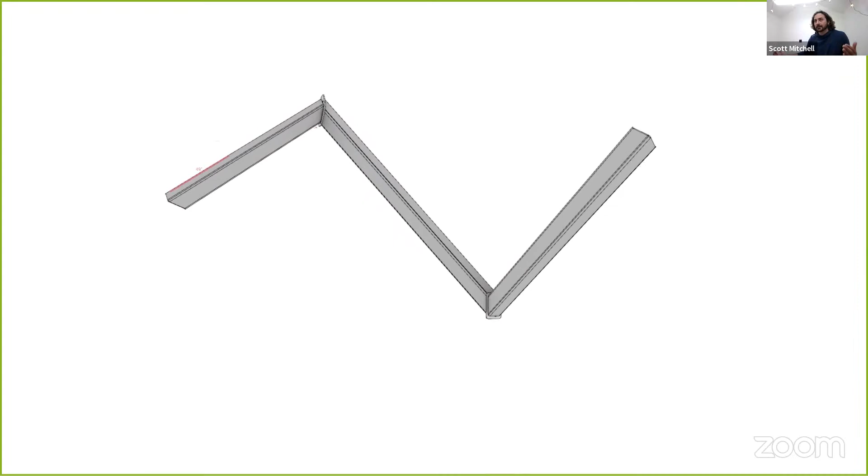Basically a laser cutter that rolls a tube through it and cuts out different parts of the tube. The idea for using tubes is we needed all these different complex tube assemblies, because we wanted it to be foolproof and members to just come together exactly like the studs did in a foolproof manner. So we have this detail where the laser cutter cuts teeth into the end of tubes, and then you laser cut plates that those teeth will register into. So once the machine's done with the parts, it's just a matter of lining up the teeth with the holes and welding it together.

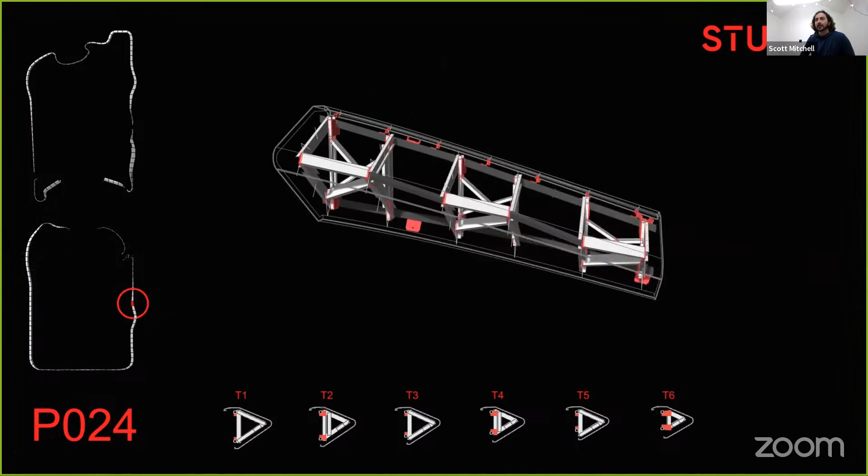And we start to get into the system of systems idea here as well. So that's how you would generate the tubes for these panels. And there's 193 of these, all unique. We start with those tube assemblies in the back at some complex, unique shape. We have a steel stud system on top of that registers back to the tubes, and then we have bent wires that weld to the stud system, then get cast into the finish.

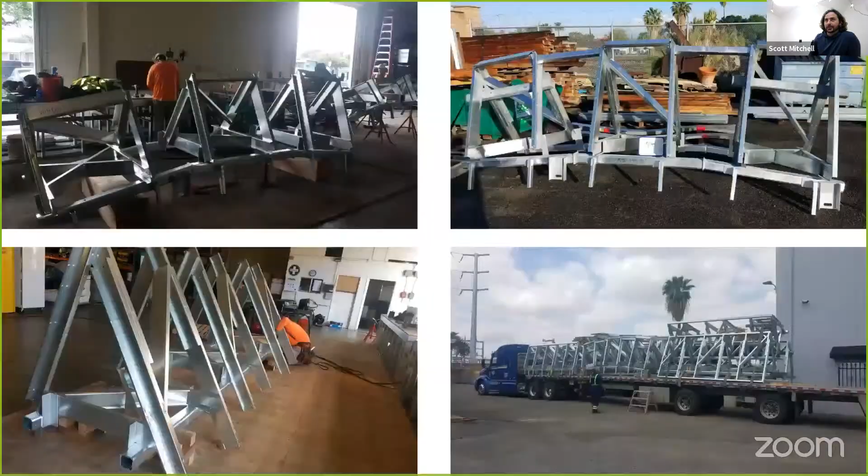So this is using all of the machines that we've talked about so far, and again, a system of systems. Bunch of different geometries. You throw it at the script that's using our software, and it generates all the fabrication and assembly information for the panels. And here's the images of that happening, just the proof that it all worked.

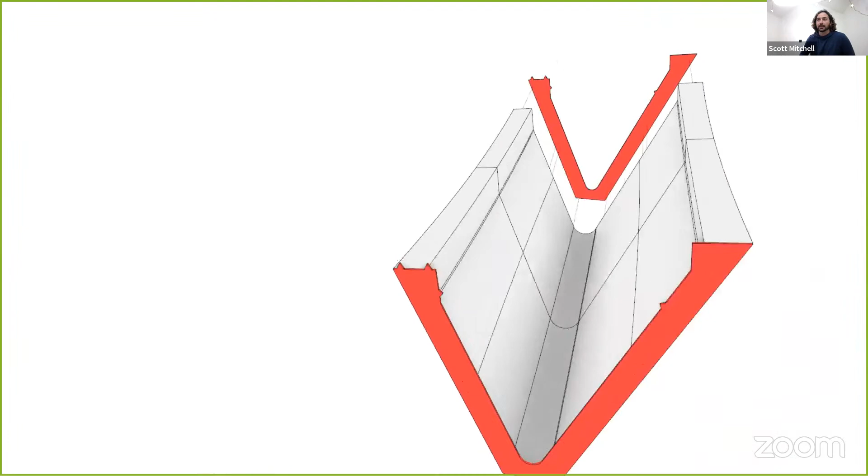In addition to creating all those, what we call the frame with those machines, with 5-axis CNC routers, we also generated the information for the molds. This is a GFRC project, which is glass fiber reinforced concrete that you have to cast in a mold. So we had the foam mold plus these plywood end boards. We had holes in the mold that lined up to holes in the end board. So you just had to put a pin in that to hold it in the exact right shape.

And we had these little triangles on here that what we call the frame locators would register to. So once you put those on, you know exactly where to drop the frame. So you get the exact right product at the end. So each panel is unique, and there's 193 of them. So you basically just have to run each panel through the computational process. It generates the information for the frame.

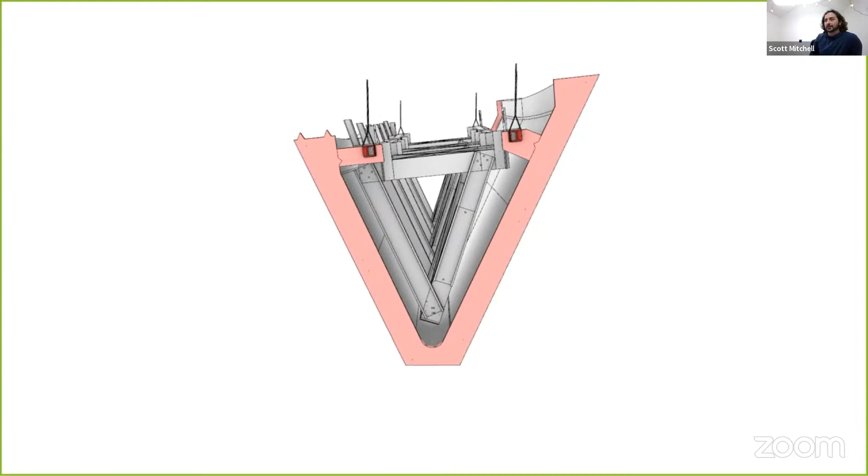It goes to one fabricator, and the information for the finish and the GFRC goes to another fabricator. So the frames were fabricated in one place, sent to the GFRC fabricator, where they lowered it into this mold and cast the GFRC around the panel.

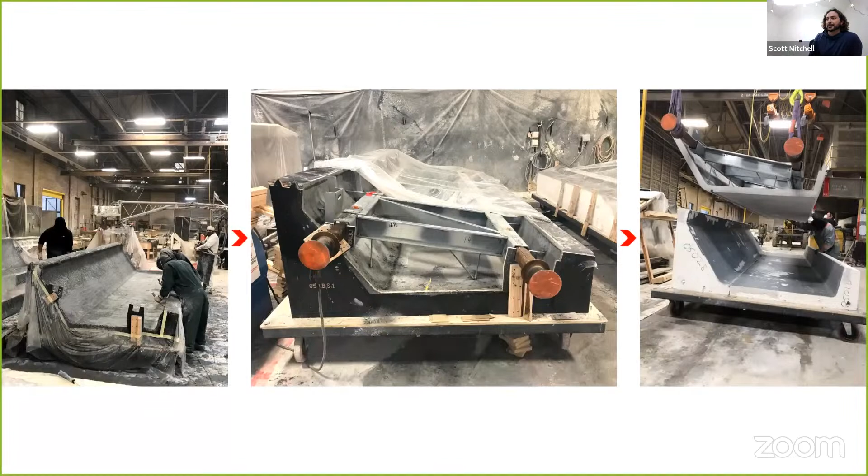So just in closing, I think this is a different project, but it demonstrates the same idea as on Lucas, where you have one design of a building component that involves a system of systems. And I think we have a unique computational approach that's allowed us to very quickly generate all the fabrication information you need to go build these things.

And so, moving into the future, what we're super excited about is all these things that we've shown with steel studs. We want to take it to wire benders, to lasers, and just make it easier and easier for architects to design with confidence, knowing that their designs are buildable in an efficient way.